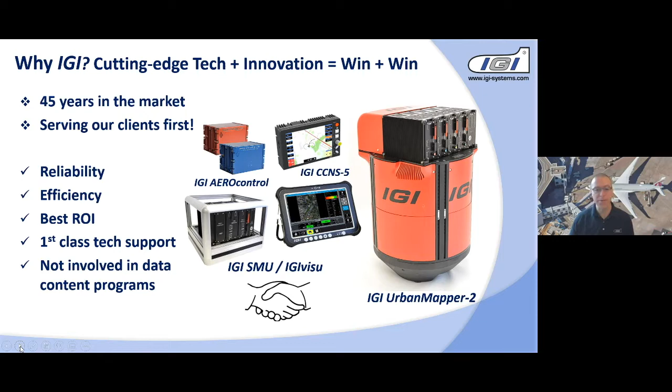I want to bring you on why IGI. We combine cutting edge technology with innovation, and what we like to say is to create a win-win situation for our clients. We really put our clients first, focusing on reliability and efficiency in our sensor technology, ensuring best return on investment and first-class technical support. We are not involved in any data content program, but stay focused on sensor development and manufacturing.

We are proud to say that we are the only vendor offering an end-to-end system, doing in-house development and manufacturing. If you focus on the IMU and GNSS, our IMU are from 1996, so the first series were introduced to the market and they became the industry standard for positioning and flight guidance. I will also show you a bit more about our aerial camera system, LiDAR system, and integration of thermal, hyperspectral, and SAR.

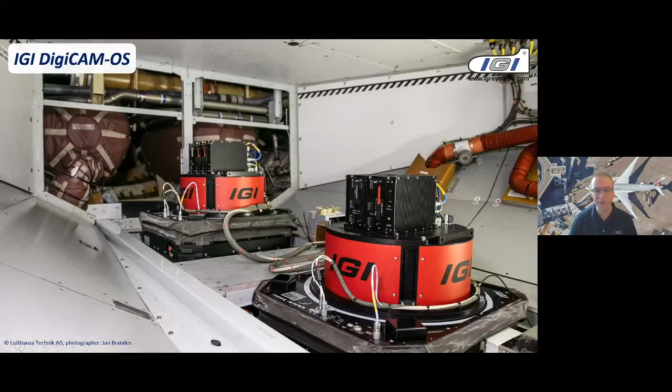Thanks to this very unique set of expertise, we are also able to work on very special projects like Open Skies, operated by the Bundeswehr, the German armed force. Here you have an impression of the IGI VISU, so we also work on the software part, and here is an overview of how the camera has been installed into this aircraft—one of the largest aircraft that IGI has equipped. It's a very special project, also showing our modularity and unique design.

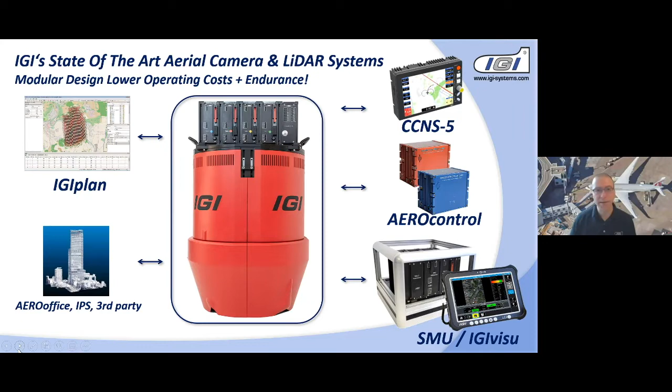Our modular design also helps in lowering operating costs and ensuring the right flexibility and easy aircraft installation. Here's an overview of the IGI VISU from the operator's point of view—you have full control of the imagery that has been captured, and full QC while flying in real time.

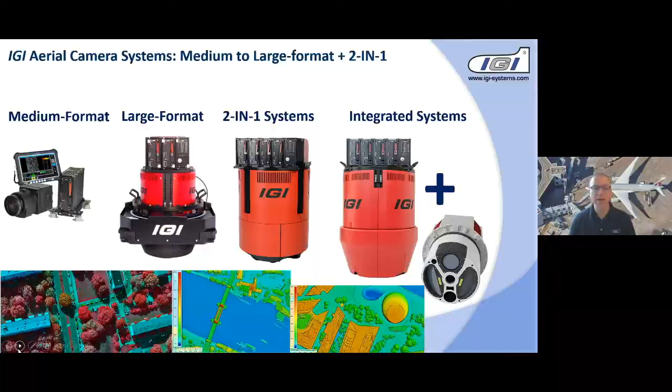This gives you an overview of our portfolio. You can go from medium format, large format, 2-in-1, and integrated systems. We can also do integrated systems like the Urban Mapper 2P together with a laser scanner like the 1560. Our clients have been collecting near-infrared imagery for many years, focusing on high resolution as you can see in this image, along with high resolution data generally. We stay focused on high resolution, but of course we also have clients flying with 10 or 15 centimeter GSDs—it's up to the client what GSD to target.

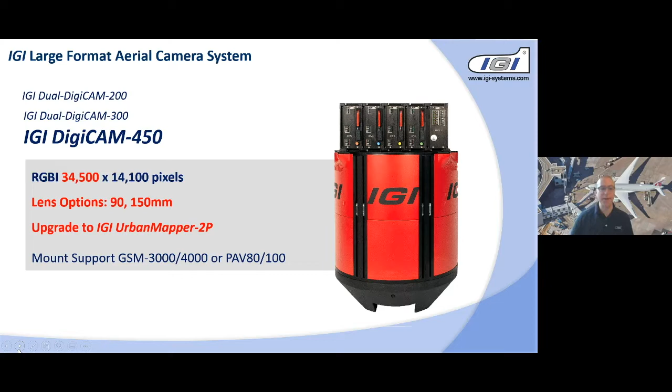I will round up a little on the airborne domain. What you can see here is the IGI DigiCam 450, our large format camera—basically the nadir part of the Urban Mapper. You have different lens constellations available. The same applies with our Penta DigiCam.

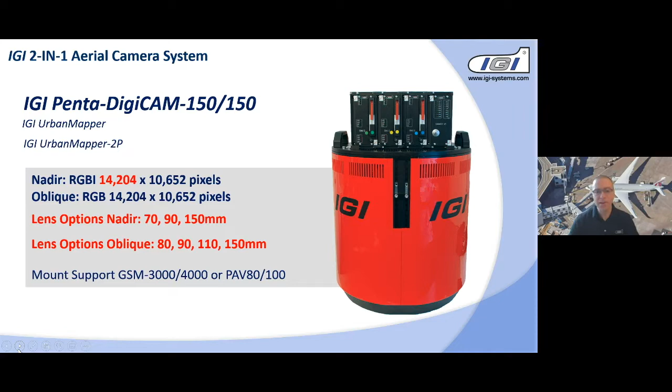This is a similar concept of the camera that has been used through the project in London, which will be presented by Dave Eitai. As you can see, there's a lot of lens constellation, so we really provide a lot of flexibility to our clients.

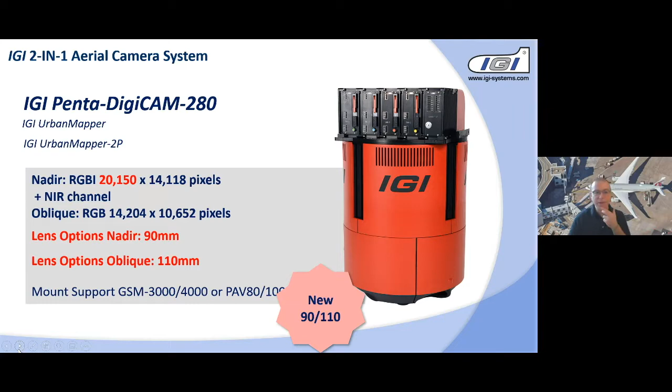This is a new system which we are offering—we already sold a unit. It's the IGI Penta DigiCam 280, with a larger native footprint. The difference between this Penta and the previous one is that here you have a larger native 280 megapixel sensor, whereas before it was a system with 5 camera heads, only 150 megapixel in the nadir. Near infrared is coming as a standard, and the current constellation is with 90 and 110 millimeter.

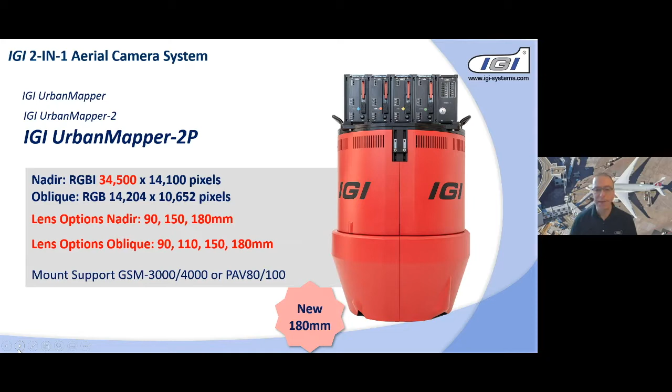I will move now to the flagship. Our product flagship is the Urban Mapper 2P, and the news is that on top of the current constellation—starting from 90 millimeter, 110, 180 millimeter for nadir and oblique constellation—we have the new 180 millimeter, something new that we are offering, in particular for high altitude flight.

An overview about the GSD that you can target: if we just stay in the middle, 150 millimeter in the nadir, flying from 2000 meters, you will capture a GSD of 5 centimeters.

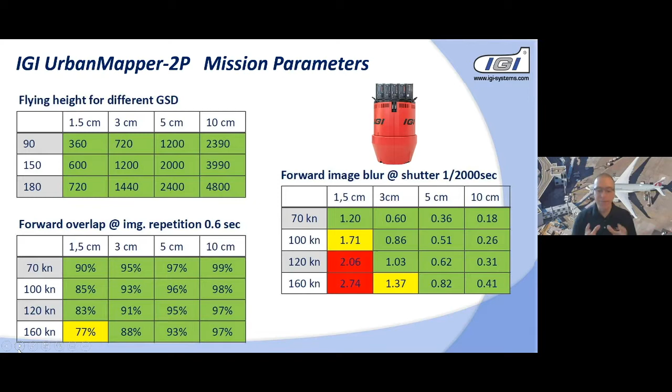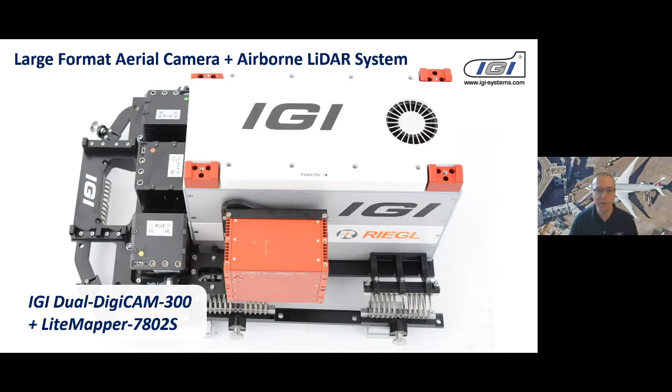Now I want to show you a bit about our LiDAR system. We have the capability to integrate a large scanner like the 780 or 1560. We did this in the past, and this is how it looks inside—it's the particular red box LiteMapper. Then you have the IMU 3-camera system, but we can also work with a hyperspectral system.

Before giving the word to Dave, I want to show you some installations. This is installation into a Tecnam of the IGI DigiCam 450 together with the LiteMapper 5800. A similar constellation and the same aircraft were used also for the project in London—the only difference being that it was done with the IGI Penta DigiCam.

So, installation into the Diamond, the DA62. You can see the LiteMapper 780 with our IMU.

You also have the possibility to have the Urban Mapper, as you have two hatches. This is the installation for our client AeroWest, IGI Urban Mapper 2P.

Installation in the large Tecnam aircraft, where you have two hatches, so you have flexibility to have a large format camera like the Urban Mapper 2P together with the LiteMapper 780 or 1560. So there's of course a lot of space.

Some installation as well in the Antonov in Russia of the IGI Urban Mapper 2P. You can see that from the operator's point of view, you have the CCNS5 together with a large screen.

So it has complete full control of what the camera is capturing, and is also able to perform QC directly in real time. Installation of the IGI Digicam 100 and the LiteMapper 1560. You can see that the scanner is really large, and it's also coming together with the Digicam 100.

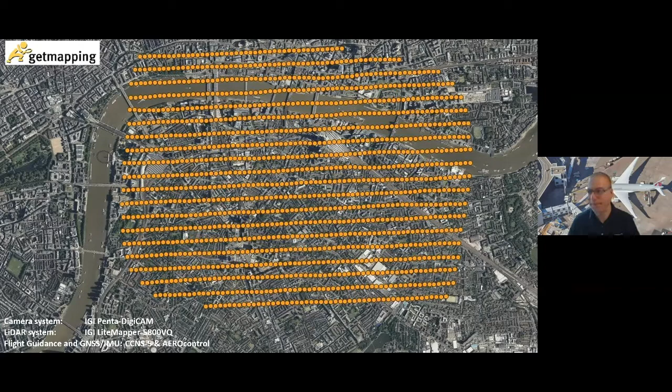Okay, I can see the slides. It's all good.

Just your microphone, I think you're muted. Sorry about that, schoolboy error there. Do apologise everyone. Thanks, Valerio.

Just to briefly introduce Get Mapping to those of you on this webinar who might not know us already, we are a geospatial data and solutions company. And as I said in the introduction, really our specialism now is around helping people to leverage the power of geospatial data into your organizations.

And I think with the technology that you're seeing from IGI, in terms of changing the way we can capture and the level of detail we can capture in this set of data, that in turn is changing the sort of conversations we're having with customers and partners and what we can do with the data.

So it's why I think this is, to me, the most exciting time in geospatial that I can recall in 30 years, because we're coming from being a niche industry into the mainstream, because the data can do so much more. Just to give a little background to Get Mapping before I get onto that.

We've always had innovation at our heart. We've been around for 23 years now. We started life as the first company doing a commercial national imagery survey off the shelf for the whole of Great Britain, back in 1999.

And back then it was 25cm resolution with a film camera, but we were very early adopters of digital camera technology, and we've been working with IGI since the early noughties, using their technology to allow us to drive forward significant step changes in the quality of data.

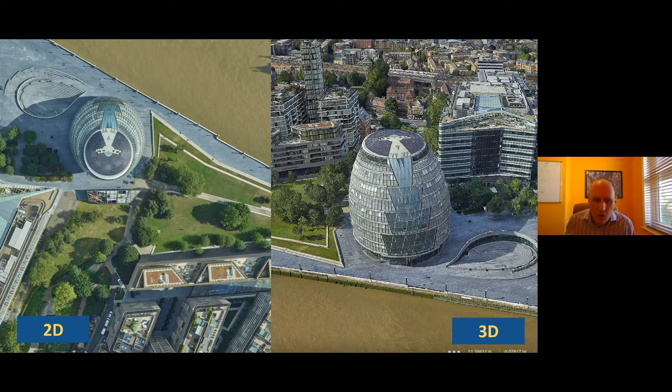It's important to recognise the big change now is you can not only work in 2D, but now in 3D as well. I'm not going to show a lot in 3D because Itay is going to do that much better than me in Skyline.

But what really struck me when we did a run through of this last week and saw Itay's presentation is he's showing practical, tangible applications of the data in 3D. I think until recently, to me, 3D data has mostly been used as a pretty visualization tool.

That's changing now. What you used to do in 2D, you can now very easily do in 3D as well, and do better in 3D and do more in 3D.

So if you want to take away from today, one of the things to take away is definitely that 3D is now coming to the party, and think about how you could do things better and more efficiently in 3D instead of just in 2D.

Just to finish up with a couple of quick examples — the challenge we have at the moment is we can fill the Get Mapping boardroom table with post-it notes of opportunities and applications of this data, and that's really exciting. But of course, I can't showcase all of that in about 2 minutes flat.

So I'm just going to give you a couple of practical examples. Again, what we want to do is start conversations. So if this in any way makes you think, I wonder if we could do this — we don't know what the answer is, but let's have the conversation.

In terms of road surfaces, you saw in the 12.5 centimetre that you can see the road markings, but now we're at 3 centimetres, super high resolution. You can also see the condition of the road markings. So we're now working with local authority partners and highways maintenance companies around identifying where there's a need for change.

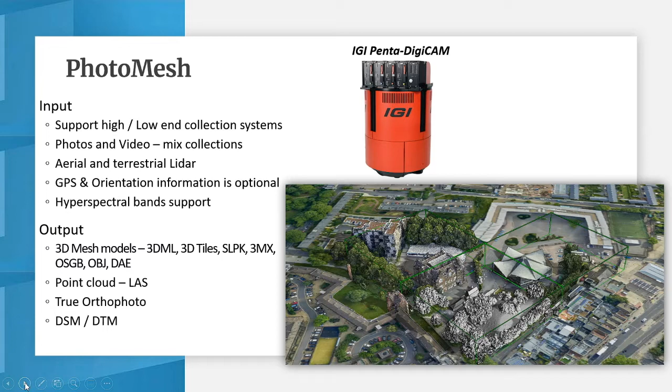For output, we produce 3D mesh models in our own format, the Skyline 3DML. We also support Cesium 3D tiles, SLPK, 3MX, and many other formats the market can ingest. We export point clouds in LAS format, plus true orthos, DSM and DTM.

We have an upcoming release of PhotoMesh 7.8. Enhancements include improved ortho quality, modifying the algorithm for better edges, texture blending, and texture selection. We've added close range capability, combining close range terrestrial data or low altitude drone imagery with aerial or mobile mapping, to get both large coverage and high resolution. There's a more robust aerial triangulation engine to combine different perspectives and resolutions, improved LiDAR integration, and enhanced PhotoMesh automation for processing data on the cloud or locally, making scaling more efficient. Overall performance is improved up to 15%, so the software is just generally faster.

Terra Explorer Desktop is the visualization component. When you produce data from PhotoMesh in 3D, you can simulate, measure on top of it, and add different geospatial layers, integrating them together.

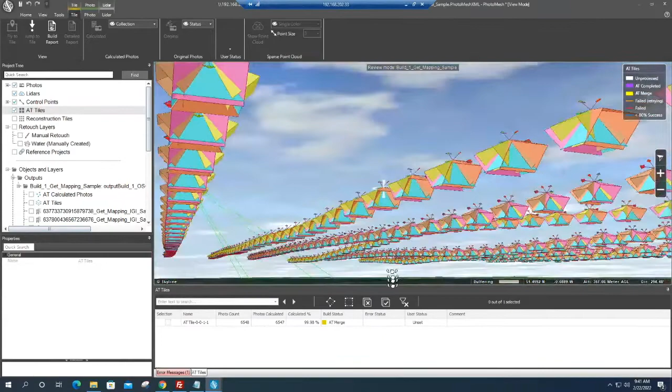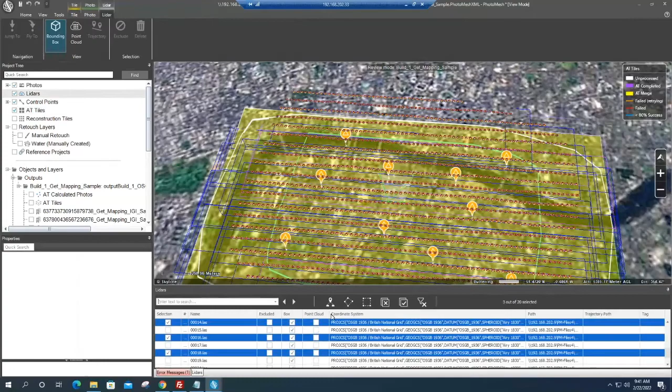This is one of the images projected onto the terrain. Over here in this blue bounding box we can also see the LiDAR. For example, if I show the point cloud, we can see all the inputs—the imagery, the LiDAR input.

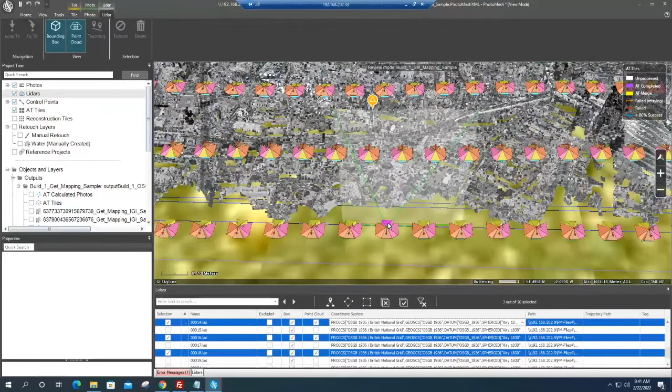The imagery was imported with the initial exterior orientation—XYZ, omega, phi, kappa—and the basic camera model. Now we can also project this image onto the LiDAR, and we can see the image being projected onto the LiDAR points already very nicely. This gives us a sense of one image being projected onto the LiDAR points.

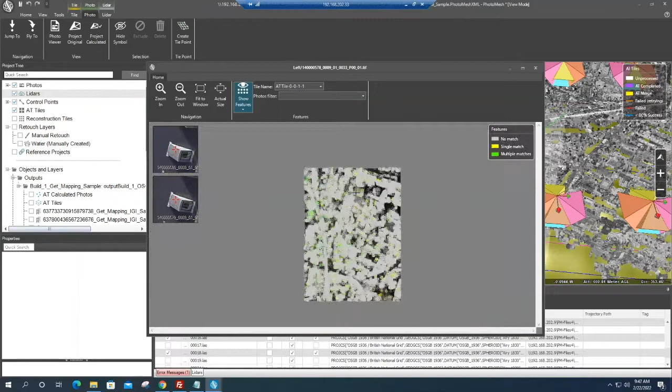Now we can also look at this image and see all the tie points that were extracted on a single oblique image, and all of the green points are multiple matches. If I click on one of the matches, I can also see the images that participated in the tie point. There are a lot of different combinations.

Some of them could include a combination of nadir and oblique—this is an oblique image, this is a nadir image. Some of them are tie points on facades, so they're most likely to include only oblique images. But there's a very large variety of combinations and perspectives in the tie points, which enable the AT to correlate everything with very low error and very high geometric precision.

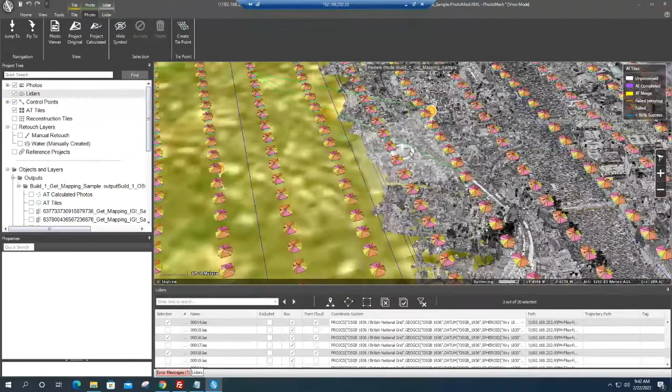Now one of these tie points, we can see over here, was used with the LiDAR—it's the corner of this sidewalk or road marking. The control point editor allows us to pick points or import points from a survey, then measure and sample them in the images. And we can see here's the feature.

The data is now extremely co-registered, extremely accurate to one another. So let's clear out some of the data that we're viewing here.

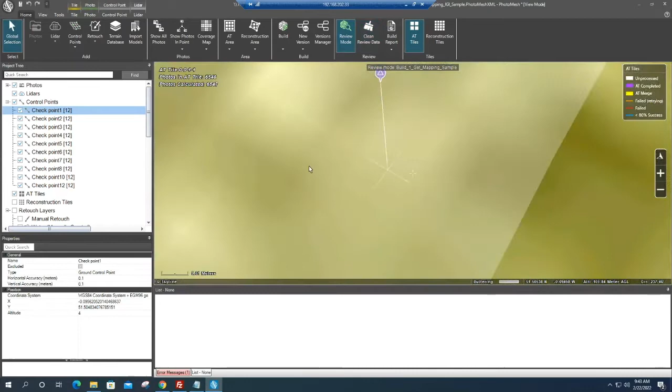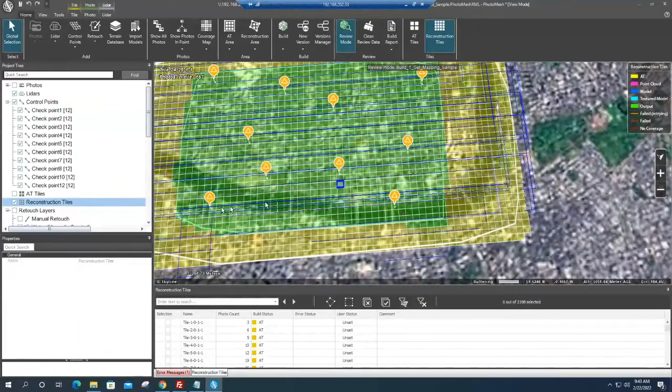Now, once the AT is complete and we've looked at the report, the project splits everything up into reconstruction tiles. We can look inside those reconstruction tiles, for example the point cloud from the photos. This is the image-based correlation, and 100% of it comes from the images.

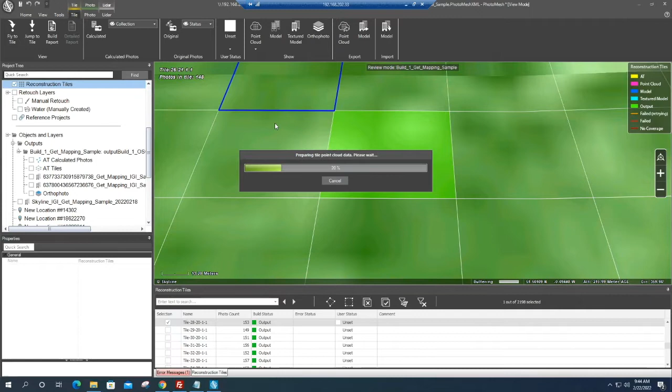And then we can also look at the point cloud from the LiDAR. So this is the image-based point cloud, and I'll turn on the LiDAR-based point cloud together. Now if I turn off the photos and look at it...

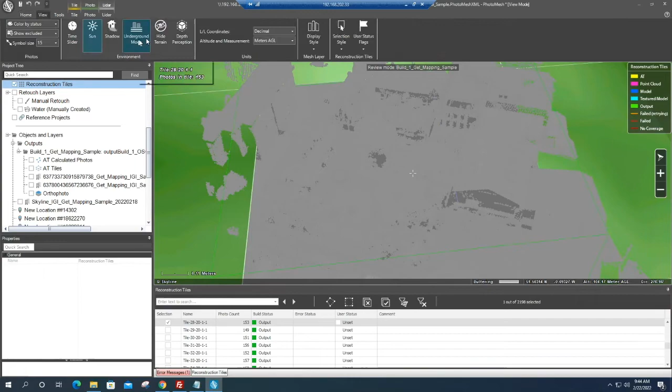Let me turn on the depth perception. We can see there might be some gaps in the LiDAR, this facade isn't as dense as we'd like, or this side of the house. The LiDAR is extremely dense and detailed, and it extracts information underneath vegetation very well.

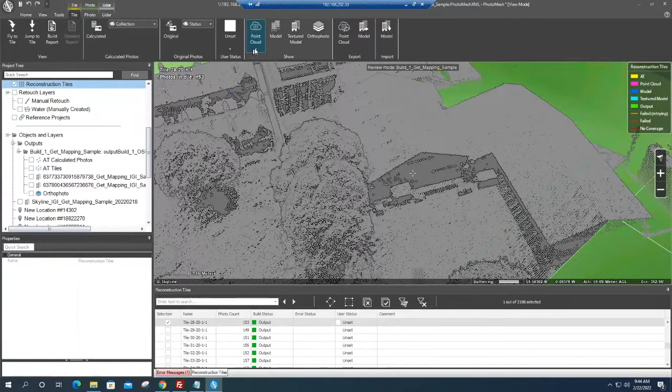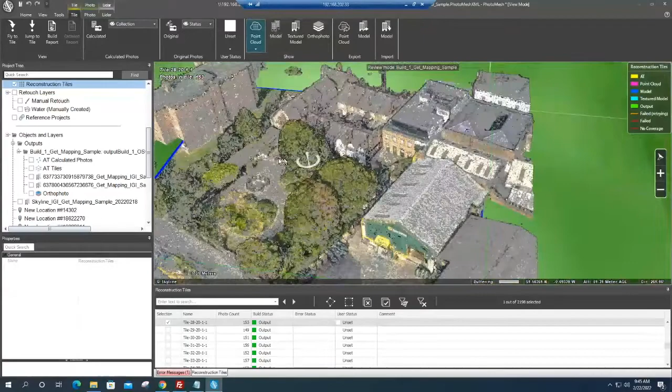When we add in the image-based point cloud, you can see it fills in a lot of these gaps. At the end, we produce a merged point cloud, which filters out redundant points and prioritizes LiDAR points so it can clean up noise from the image points. This is the merged point cloud, combining both the image point cloud and the LiDAR point cloud. This is the surface model, and then that model gets textured.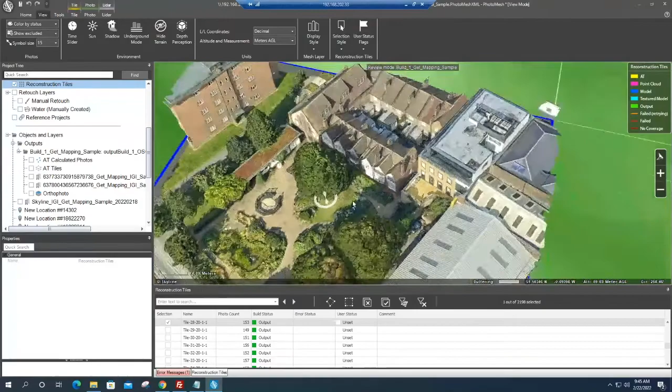Itai, I have a quick question. Was this real processing just now, or are these just different views and the processing has already been done in the back? Yeah, this has already been processed. I'm just showing this to show the nice separation between the tree and the building given the LiDAR.

On this specific tile, it produces the ortho on a tile basis, and then all the texture models on a tile basis, and then combines everything into a single complete layer. At this point the project is complete, with all the outputs exported: the ortho, DSM, OBJ, meshes - really any output you'd like from the software.

We'll jump into the TerraExplorer portion. So now when we're done with the project in PhotoMesh, we can open it inside TerraExplorer, the TerraExplorer viewer. You can see it has a lot of additional information - you can add boundaries, names, cities, locations, GIS layers.

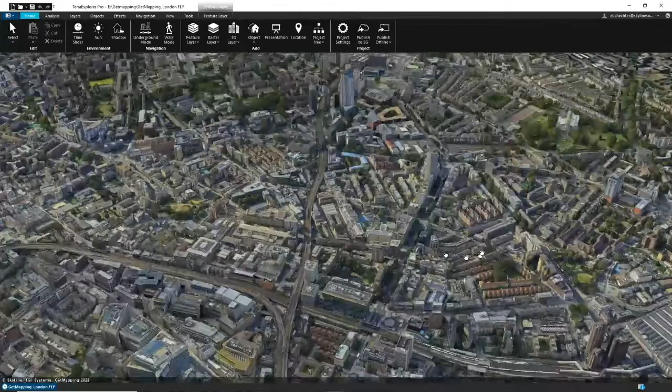Right now we're looking at the mesh. This project also contains the true ortho that was produced. And the LiDAR, just a second - here's the LiDAR, colorized in a nice way. Another advantage of TerraExplorer is it can also display point clouds at very large scale.

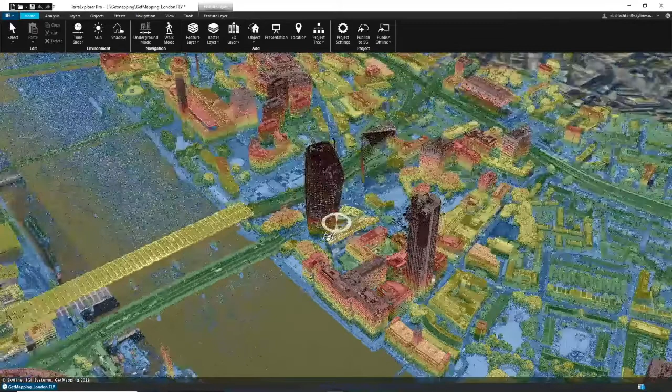We'll discuss a little bit the difference between the 3D product and the 2D product, and how they provide different information, and why they're both necessary.

For example, this building is a nice 3D model. When we look at it in the ortho, we can see the supposed footprint, the building being rectified down to the ground, or orthogonally. If we look at the building footprint, it would look something like this - just to give you an idea, this is a true ortho, so you're not going to see any building lean, everything is perfectly vertical.

The difference between this and, let's say, a mosaic is this. An ortho mosaic rectifies the image on a per-image basis and not on a per-pixel basis. So tall buildings can have displacement, and you can see over here it actually covers the road - so you lose data, and this is not the true representation of any of the building footprints.

So first of all, this is a true ortho and a very high quality, useful product - it's actually an engineering grade product. Everything in 2D has the correct scale and the correct relative relationship.

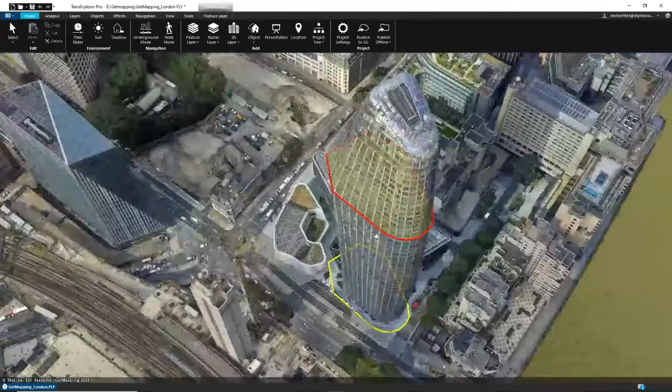If we look at this building in the 3D, we can see this is the footprint on the ground, which obviously doesn't represent the actual footprint of the building. It more represents the footprint at the widest point of the building. What is the actual footprint is this one.

Okay, now if we look at this on the ortho, it's very hard to see the footprint, obviously the actual footprint on the ortho or in a 2D view. So this is where 3D becomes very critical, also in the ability to see all this information in the street on the true ortho. And in the 3D, you also start to get more than just information from a 2D view.

So you're saying some of this information is still visible from the top, this is visible from underneath, but we can also look at an example like this. Let's say we have GIS data, and this data is the Ordnance Survey Master Map topography. First of all, we can see how accurate it is and how well it lines up with the 3D data. It's pretty much on the pixel.

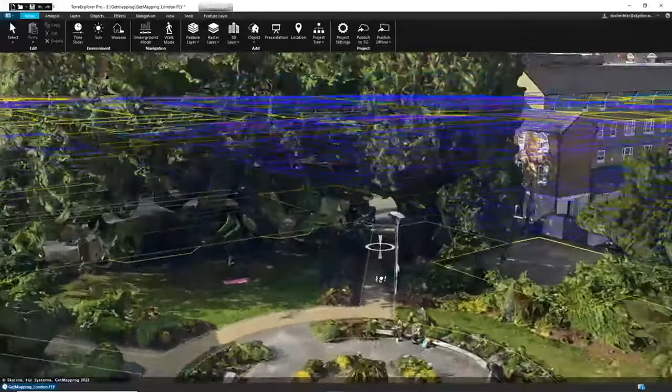Second of all, you can see that if you're looking at vector data on 3D, it starts to disappear or get hidden behind trees. We have the option to do show-through, so when you zoom in, you can see through the buildings and see all of the vector data. Over here, for example, this is very useful to see in the 3D. You can see this path going actually underneath the trees, and with the LiDAR data, it extracts that information, so you get the full benefit of seeing underneath the sidewalk and understanding what all these markings mean. It's always an option to look at it on top of an ortho, which would look like this, but you can see this doesn't have the same level of information you'd be able to extract in the 3D or tree coverage.

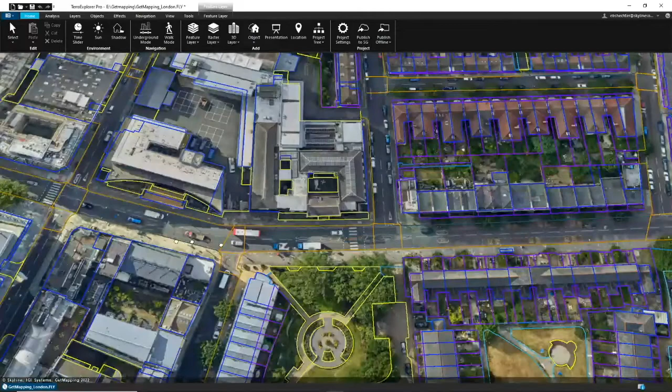Okay, so this is one aspect of it. Over here, by the way, you can see it has both footprints, interestingly. It has the correct one, the inner one, and it has the total at the widest point footprint. And they both line up perfectly.

The other things that we can integrate in, so when you have a 3D mesh, you can also colorize it. I'll turn off the topographic layers for a second, so you can incorporate building footprint information or cadastral information. I can click on it and get its attributes and display its labels. So you're looking at the 3D in a very informative way, not just in a visual way.

The other aspect of it is we can also incorporate road layers, and this could be viewed both on the 2D or on the 3D, and this can also have the show-through capability. Okay, so these are some of the GIS integrations and using 2D and 3D, the benefits of having either one.

Another concept of it is using underground. So first of all, measuring in 3D doesn't account to just area or footprints. We can also look at this area over here. This was actually an article that came out about a certain viewing platform.

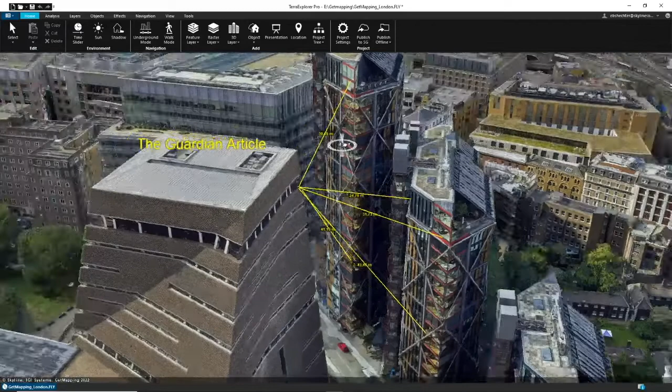I'm sure a lot of people in England are familiar with this. Over here it states that it's about 34 meters away from people's buildings or people's living rooms. But when we actually look at it in the 3D, we can see that it depends really on which apartment you're looking at, and it could be even as short as 24 meters, or 32 meters, or 43 meters. So these are different 3D measurements, and it would be very difficult to do any sort of measurements or prove it looking at an ortho, where everything is just a single measurement to a 2D representation of the rooftop.

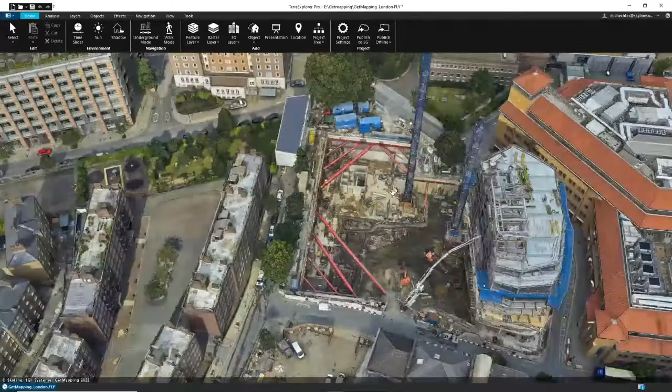So this is another example of using 3D for accurate measurement in critical situations, practical applications. Now if we look at the underground data, we can also see how it interacts along with the city, and this allows us to navigate underground. Now some of the applications for this could be if we're looking, let's say, at a construction site. First of all, we could see it represents the depth of the construction site, and this is something we can measure. We can measure the volume, the cut and fill, and we can also represent what it looked like before. We can modify the mesh on the fly.

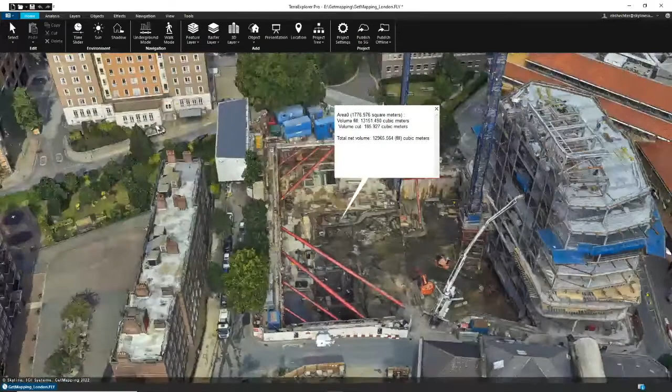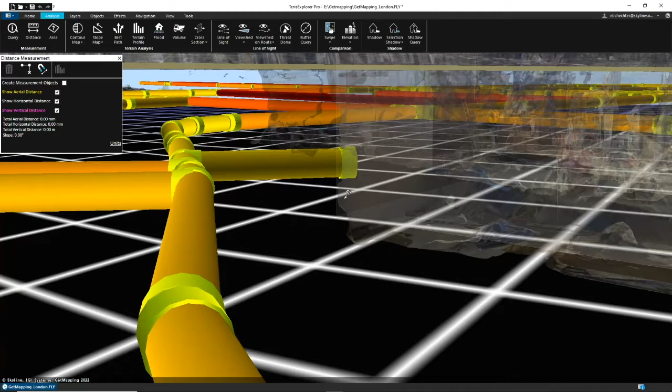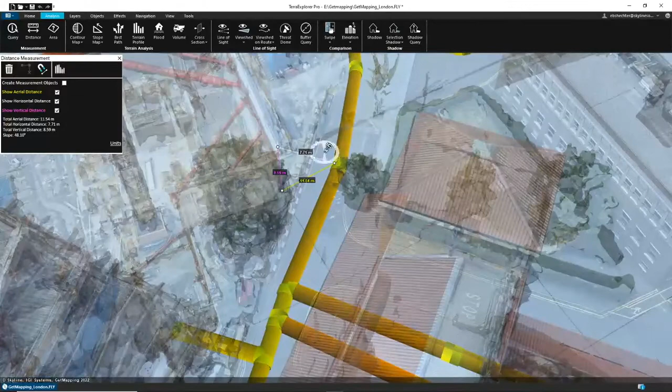So if we look at the representation of what this building would look like, and if we look at the location that some of the pipes pass close to the area right here, we can see how close it could get, and we can also measure it very accurately in all the axes. So we can measure about 5 meters away, but we can also measure the distance to the surface of the corner. So really any sort of 3D measurement that you want to do inside the underground environment. You can see about 8.5 meters below surface and about 5 meters away from the pipe. Yeah, that's really amazing.

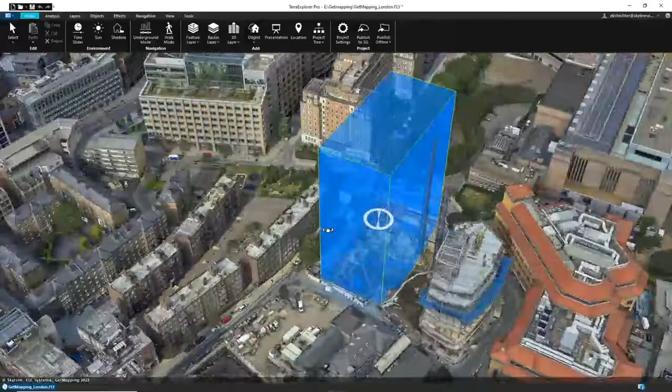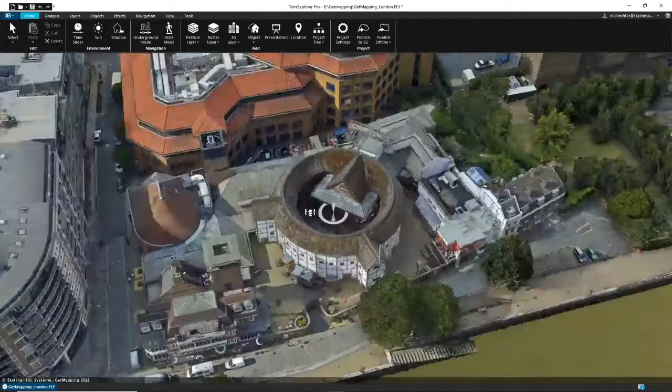Now let's say we have a CAD model of a building that wants to be designed, or a high quality representation of a building model. We can jump to the location, like the Shakespeare Globe. This is the dynamic, interactive mesh we're playing with, and we can edit it on the fly. We can flatten this mesh and place a model of the Shakespeare Globe on top, and even jump inside to see what it looks like.

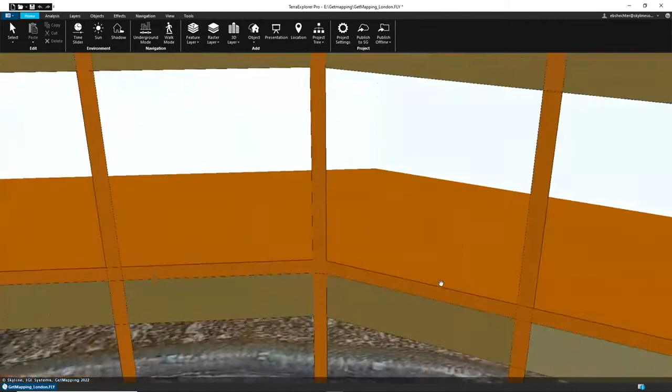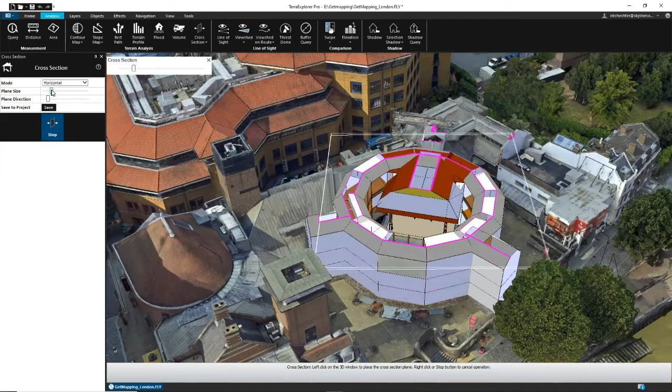From the outside, whenever you have more complete BIM models or internal information, one thing you can utilize is the cross-section tool. If you want to view it floor by floor, I can place this on top, make it a little bigger, change the direction, and move through the building to see the different levels. So you can integrate additional BIM models and CAD models seamlessly with the mesh, all in one single complete environment. You can see how well it interacts with it.

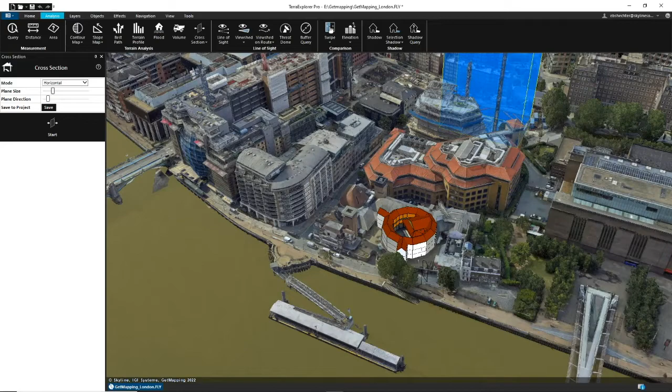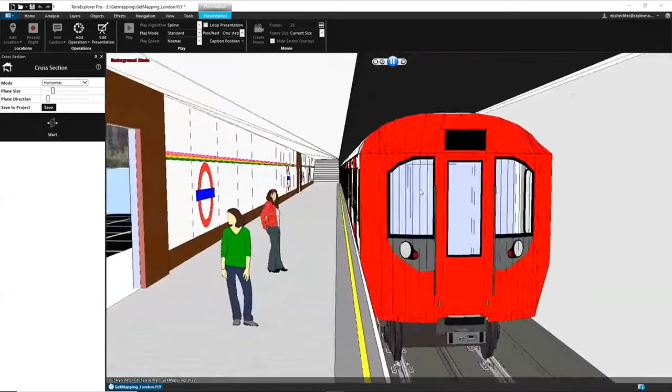And then if we look at some of the other underground capabilities, we could turn on underground. If you have the tube or the London Underground, you can integrate different models of it, models of the trains. Pretty nice model of that.

And the last thing is that when you have everything nicely configured and you want to visualize it, you can always just create a presentation. Like Valerio was showing, you can have the different layers turned off or on. You can jump through automatically with the video we're showing. So everything can be put together into a nice presentation or shared in that presentation, and while it's doing it, you could turn off layers.

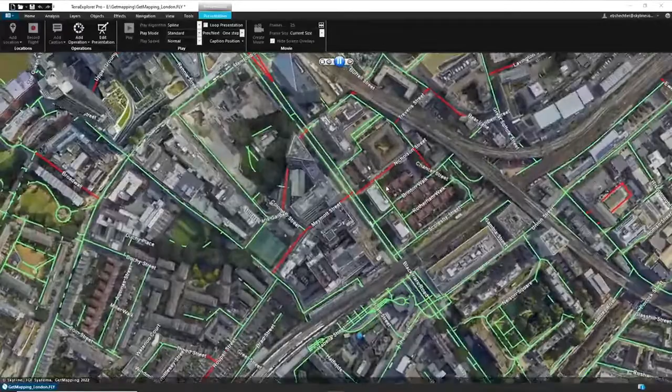And that's about it. Great, it's really looking awesome. Yeah, also lots of potential, so I think this is really great.

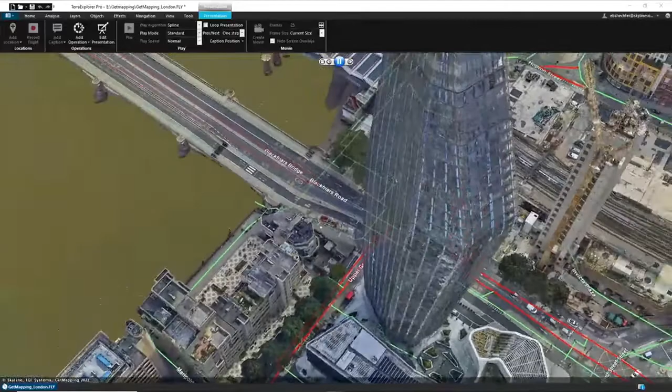So even though we have seen possibilities with aerial imagery data, and also in 2D and 3D, this is really amazing. But I think unfortunately we couldn't get the Q&A session in, so this is something we have to apologize for, because this is not what it was intended to be. So this is just half the story, I think, for a webinar.

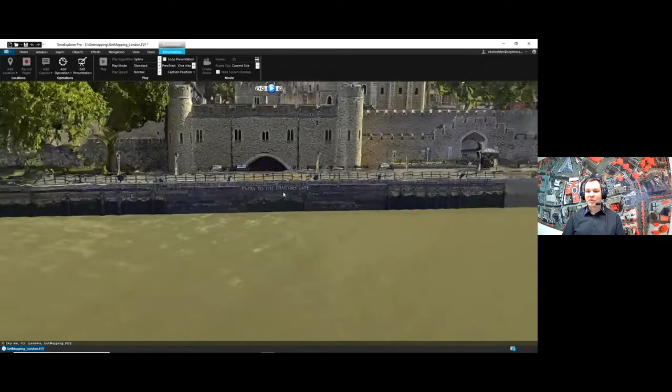It was an amazing demonstration, also really showing the abilities that we have from 2D to 3D, but also in application, which is exactly what Dave was mentioning. So producing high quality 3D data and products, and then working with this data, not just for visualization, but also real 3D GIS application.